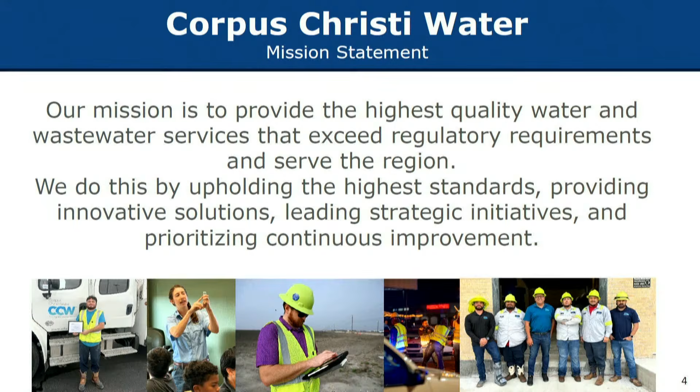Of the department, this fiscal year, I think they've excelled at adhering to our mission statement. As you know, a big part of our operation is adhering to the consent decree. So the next 20 or so slides will be specifically covering this 15-year agreement and the progress.

The consent decree is a court-approved agreement between multiple parties: the U.S. EPA, the Department of Justice, the Texas Commission on Environmental Quality, and the City of Corpus Christi. In fact, all communication and official reporting regarding the consent decree is distributed to all of those parties.

The requirements of the consent decree are meant to achieve full compliance with the Clean Water Act and the Texas Water Code, and prevent sanitary sewer overflows. We refer to those as SSOs. You'll see that multiple times in the next couple of slides.

Prioritize response to any spills caused by contractors, wastewater spills, and SSOs. To upgrade, operate, and maintain the wastewater collection system, and to upgrade, operate, and maintain the wastewater treatment plants. This includes adhering to our Texas Pollutant Discharge Elimination System, sometimes referred to as the TPDES permit.

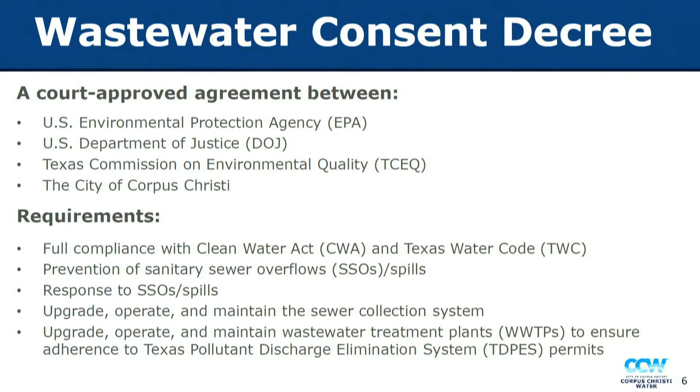When you look at the agreement, we've got it detailed here on slide 7. The agreement started January of 2021, that's when it was officially signed. The agreement will end in 2036.

You can see the beginning of the consent decree is heavily focused on condition assessment - assessing the system, identifying where the problems are. Then as you get through that first part of the consent decree, you start moving into the remediation measures, dealing with large capacity constraint projects, which are all shown in our capital improvement plan.

The one thing I want to note is that it does provide metrics for cleaning. There are priority areas listed in the consent decree, and we have to maintain and clean those areas as shown on this chart. The other key note is after that 15-year agreement, it doesn't mean we stop cleaning and inspecting and maintaining our system. It just means that the formal metrics and reporting to the TCEQ, the EPA, and the Department of Justice is over with.

In fact, we have a document that guides our operations currently and after the consent decree is over: the Capacity Management Operations and Maintenance Plan. We refer to that as the CMOM. You'll see that a couple of times in this presentation as well. That CMOM document is submitted to the TCEQ. In fact, it was updated this year and submitted as part of our annual report. That document governs both current operations and also future operations beyond the 15-year consent decree.

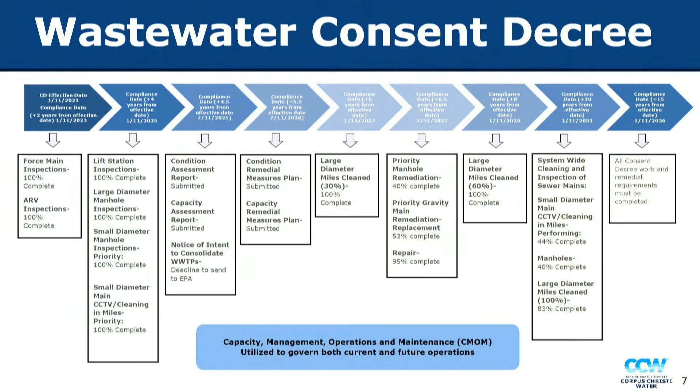If we could, I'd like to talk a little bit about work completed to date. And in fact, the team did a great job. We looked at the work that is done per district. We thought you'd be interested in that.

So we have the district, each of the 5 districts on the left, and then miles of CCTV complete - that's closed-circuit television, so it's a video survey of the wastewater collection systems. And then we have the miles of pending video inspections required, the number of completed repairs, the miles of pipe replacement that have been completed, and the miles of pipe replacement in process.

You can't look at each district on an even basis because some of the districts have newer infrastructure, and per the consent decree, that's categorized as a performing asset in good condition. So when you look at replacement, those districts would have less replacement. The districts with the older infrastructure, you'll see much more replacement in these totals.

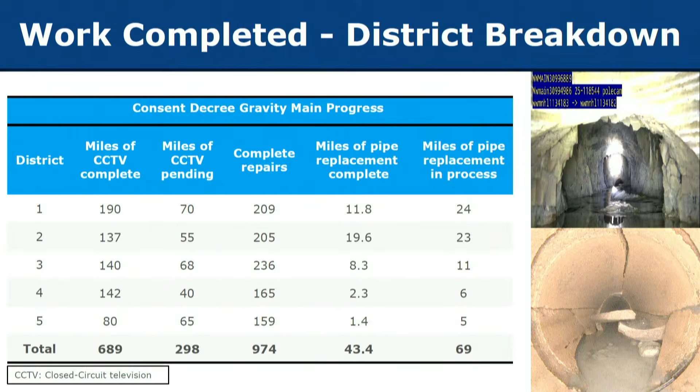Wastewater manholes - we have approximately 20,000 wastewater manholes in the city, and we have a large number of historic brick manholes within the city. Those brick manholes fail over time and they need to be repaired. So you can see the number of manholes, again per district, the number of manholes inspected, the number of manholes remediated, and the number of manholes pending remediation.

The picture on the top right is a manhole that requires remediation - we would call that a failed manhole. And then after remediation, the picture on the bottom right looks much more pleasing and certainly a definite upgrade.

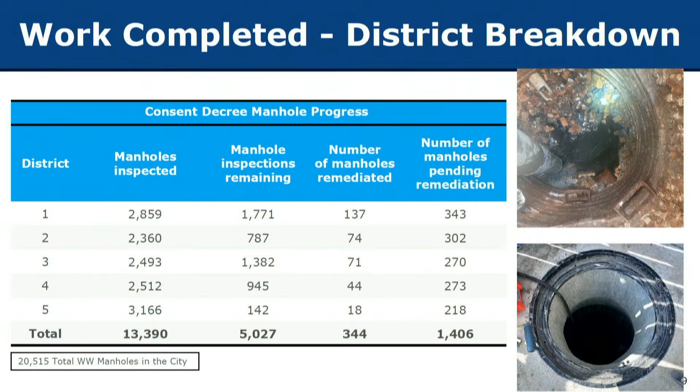I am pleased to present that the manhole rehabilitation is done both by our CCW crews and also by contractors. We've gotten a lot of this work done because of the work of the CCW crews and the additions made previously by this council, additions in employees.

Sanitary sewer overflows, those are the SSOs that we talk a lot about. Since 2018, we've generally seen a decline in sanitary sewer overflows. In fact, earlier than 2018, those overflows were much higher and much greater, which is one of the primary reasons why the consent decree was even issued. But for 2025, we had a low of 36.

I should back up, the consent decree is calendar year, so the reporting for the consent decree is done on an annual basis. All of these numbers are calendar year. Unlike city operations, where we typically look at fiscal year, because of the reporting for the consent decree, it's calendar year.

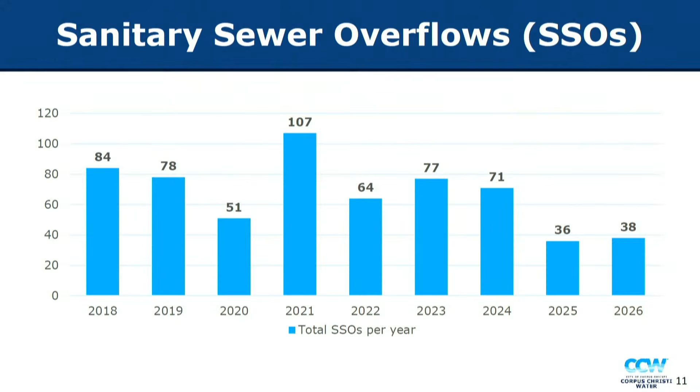As I stated earlier, the consent decree has a number of targets and metrics that we have to complete. Initially in the consent decree, it's assessment heavy, as you can see. If you look at the force mains inspected, we've reached 100% of our goal. All of the force mains have been inspected.

That's 138. ARVs, that is an air relief valve, a key component on a wastewater system, and certainly a failure point. So it's important to inspect those ARVs and then maintain and replace them as needed. All 244 ARVs in the system have been inspected.

The lift stations have been inspected. At the time of the consent decree, there were 102 lift stations within our system, and the consent decree required the inspection of all 102 of those. Lift stations added after the consent decree are of course also inspected, but they are not reported under the consent decree. Those inspections are all done under the governing of the CMOM document, or operations plan.

Large diameter manhole inspections, 682. Those were identified manholes that we were supposed to inspect per the consent decree. Then we have small diameter manhole inspections, and the miles of video survey, or closed circuit TV inspection and cleaning that we have performed. That's 451 miles.

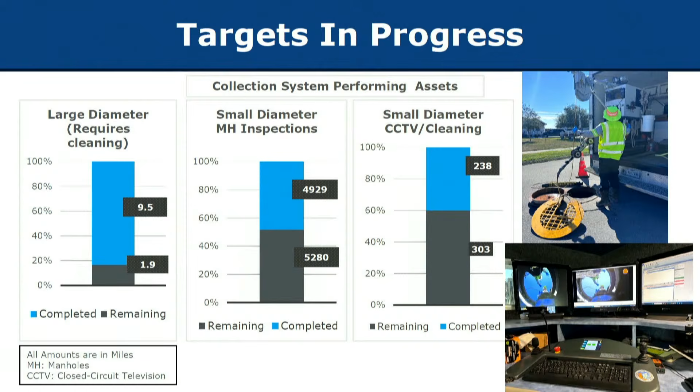Targets that are in progress per the consent decree include the cleaning of our large diameter mains. We've completed 9.5 miles of that, with 1.9 miles remaining. For small diameter manhole inspections, we've completed 4,929, with 5,280 remaining. And for small diameter cleaning, we still have 303 miles left to do, along with video assessment through closed circuit television inspections.

One thing this council has asked us to look into, especially because of the advancement we've made in achieving these metrics, is to request removal from the consent decree. So on September 23rd, 2025, we did request dismissal from the consent decree. On December 9th, 2025, the response came from the Department of Justice, stating that the agreement is to remain in full effect over the 15-year period. That's not uncommon — I'm not aware of any municipality that has been able to dismiss this consent decree early.

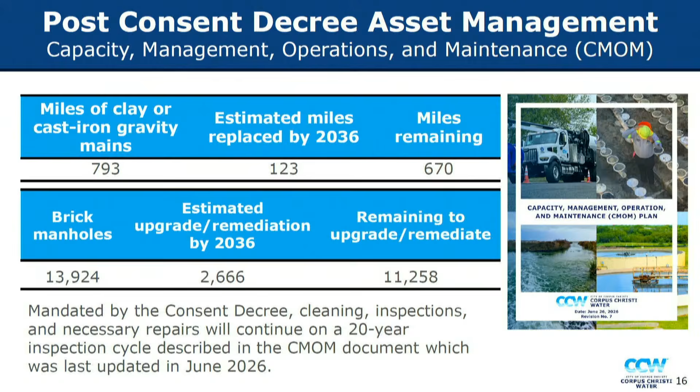I would like to talk more about costs associated with the consent decree over the next couple of slides. This can be a challenging topic because my opinion is that every aspect of the wastewater operational and capital budget is associated with the consent decree. The full budget affects and is related to the consent decree. That's because the consent decree is just a method to ensure we're operating and maintaining our system.

However, the consent decree does put together specific aspects and requirements which helped the city staff determine some estimated costs associated directly with the consent decree. So what we've done is we've listed explicit and implicit cost. An explicit cost with a consent decree is something that is expressed literally in the consent decree, identified specifically in the consent decree. Implicit cost, which is just the operation and maintenance of our wastewater system, that is listed as well.

Again, if we don't maintain our system, we will get fined under the consent decree. That is why the proper upgrade and maintenance of our wastewater treatment plants is definitely considered an implicit cost to the consent decree. So the specific or explicit costs of the consent decree, that is costs associated with the inspection of the wastewater system, those CCTV inspections that we talked about, the wastewater collection, the repairs of major maintenance systems.

Mayor, can I ask a quick question while we're pausing? Can you hear me? Yes.

So earlier, at the beginning, you mentioned one of the problems we have by the Nueces River and Calallen is that we've had some backflow in terms of when we have a storm surge and we're getting sewage backflow. I know that's on the list to be worked on, but can you give us any insight in terms of how long you think it's going to take before we actually get to that project? Because there is some concern due to the proximity of the Nueces River being right by those homes that have that backflow.

Yes, sir, Councilman, I apologize, and that's an excellent point. As we know, a large portion of our water supply gets to the O.N. Stevens water plant through the Nueces River. There are a number of homes along the river that utilize septic systems, and we do know over time there have been releases into the river because of overflows or backflows from those septic systems.

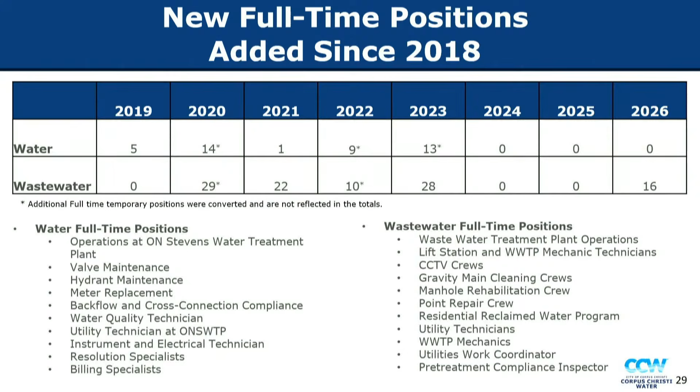Mayor, can I ask a quick question? Is it possible that, beyond full-time staff, you could also provide information on whether we've had to go out and hire temporary staff or consultants to do jobs instead of full-time employees? I'm thinking mainly about grant writers and things of that nature, just trying to understand our ratio of full-time employees to consultants.

Yes sir, Councilman, I'm taking notes so we can get back to you. It didn't exactly answer your question, but the example earlier on self-performed savings in the wastewater department partially answers it. I understand you're looking at the ratio of full-time employees to consultants and professional service providers and contractors. Not necessarily a ratio, just some kind of comparison record—for example, hypothetically, if you spend $2.5 million on full-time staff and $300,000 on consultants, something of that nature, so we can understand where we're at. I think that gives us a true idea of the total picture. You got it, I understand now. We will get that to you.

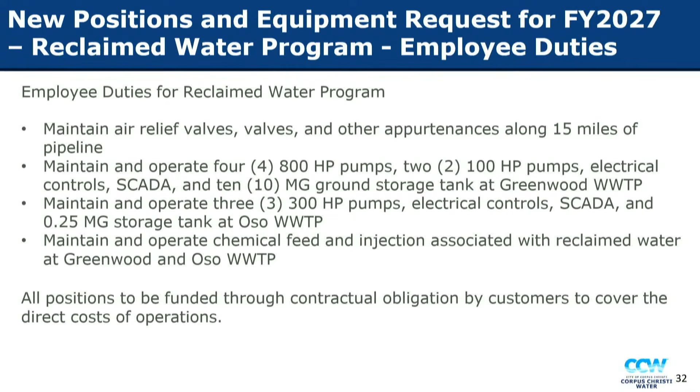The next enhancement is the additional position for the UBO team. This is associated with the acquisition of the Rockport Gas Department. We will have approximately 4,700 new customers, and this request is to provide 1 additional employee, but also some professional services associated with Infor to help us with the rate, to develop the rate table needed for these new customers, and incorporate that into our billing program.

We'll have alignment of ordinances, establishment of any fees we'll have to do with these new customers, and also set up a complete new billing cycle. This cost, because it's associated with gas, but CCW operates the utility billing office, will be covered through an allocation, the budgeted allocation from the gas department.

The Utility Assistance Program, we covered this last week, but the request is for 2 new positions to help administer this program. Currently, the program is run by an outside third party. The goal is to bring this program in-house so that we can better manage it, and also be able to help our customers directly instead of providing them another phone number to call.

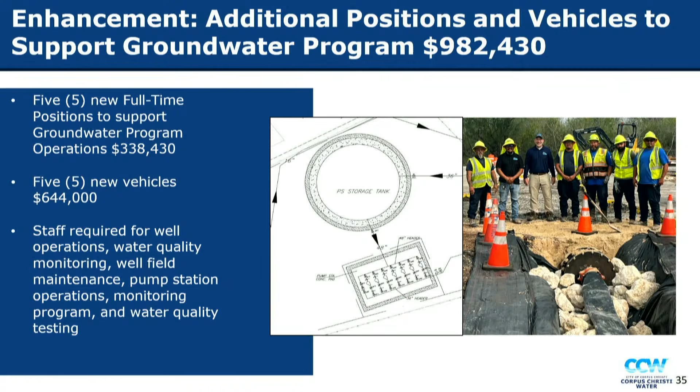They will operate and maintain the eastern and western well field within Nueces County. They will also operate and maintain the pump station at the western well field, which consists of 7 250-horsepower pumps, electrical controls, and a 3 million gallon storage tank.

They will operate all well pumps at the western and eastern well field, including observing and tracking motor operation and power draw. They will monitor water levels, both within the production wells and the monitoring wells. They will review and calibrate our water quality sensors in the river and in our monitoring wells.

They will conduct pump operational analysis and observe well performance, making recommendations for any needed well rehabilitations or pump repairs. The team will also maintain and calibrate the measurements along the river required for our bed and banks permit.

They will service and maintain the natural gas generators at the eastern well field. Those well pumps are powered by natural gas. There are 2 150 kW natural gas generators there, along with 3 500 kW natural gas generators. Those generators require maintenance. We do daily checks, fluid checks, belt inspections, and filter checks.

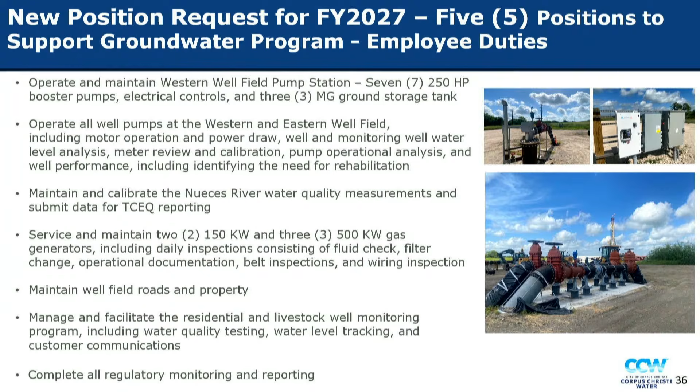Hello, Council, again. This request was from Councilman Barrera to break out the rate revenue generated by the different customer classes. We did it for both wastewater and water. In wastewater, we do not have industrial users, just commercial and residential users. We only service 14 residential customers outside city limits and 22 commercial customers.

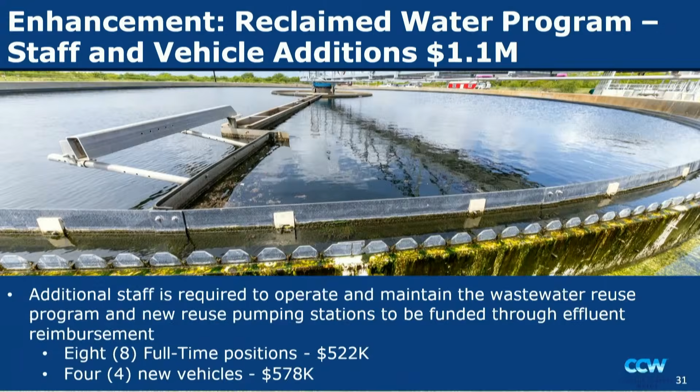Yes, and I do have that if we could bring up the presentation... I don't have it on this one, but I can provide it, it was in the last presentation. The breakdowns of the minimum changes will be part of next week's presentation for the actual rates. It will show the changes in the minimum, changes in raw water, and changes in the volumetric.

Councilwoman Vaughn: Good job again on the presentation. Let me ask you this, because we've had our citizens, industry, and everyone conserving on water, how has that affected the city's revenue?

Well, a big portion of last year's increase, over $4 in water, was due to the decrease in volumes. If you have a dollar to recover and you have 1,000 gallons, it's simple math, one divided by the other. If that volume drops, it causes a change, so a drop in volumes basically causes an increase in the rate. The more water we can sell, the cheaper the rates are. If you conserve and sell less water, our costs don't come down, so the rate has to go up.